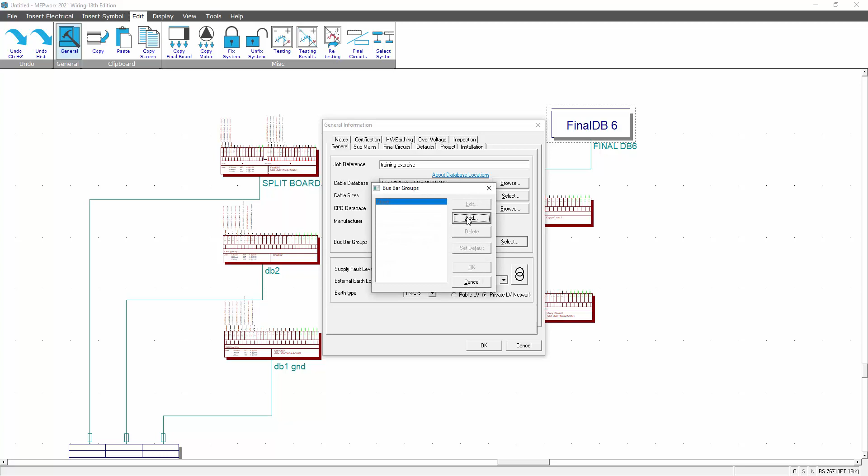So what we need to do, if we're going to put bus bars in, the first thing we need to do is go to Edit General and create what we call a bus bar group. So in the middle of the Edit General tab, you can see bus bars, 0 group selected. So what I've got to do is go and select a range of bus bars from the database based on the ratings of the boards and the fault levels I'm getting. So I'm going to make a sensible selection.

Each of those boards is about 40 amps a piece. So I'm going to look at a minimum between 25 and let's go for, I don't know, 200 amps. And you can also look at your short circuit ratings, fault ratings, so you can be more explicit in your selection process. Obviously, the more explicit you are, this reduces the number of potential bus bars you can apply.

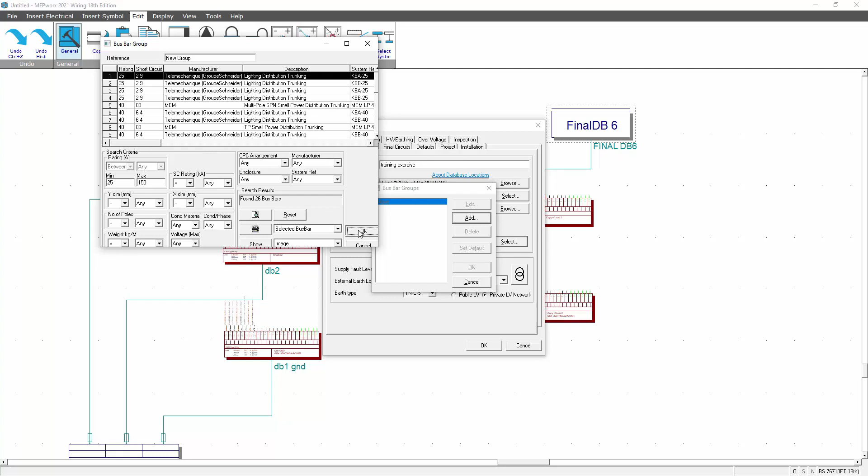So I'll OK that. So you can see there, I've got more than 50, needs to be less than 50 bus bars. So I'm going to bring that selection basis down a little bit. And let's say 150. Run a search on that. 26 bus bars, that's more like it. And OK that. So we've now got our bus bar group defined.

What I need to do is then on the Insert Electrical menu, I can put the component bus bars together by putting a vertical right tap off, where we would put the tap off to the bottom left of the board, and interconnect our individual sections, and then interconnect the cable or the section to each one manually. So we could build it up component by component.

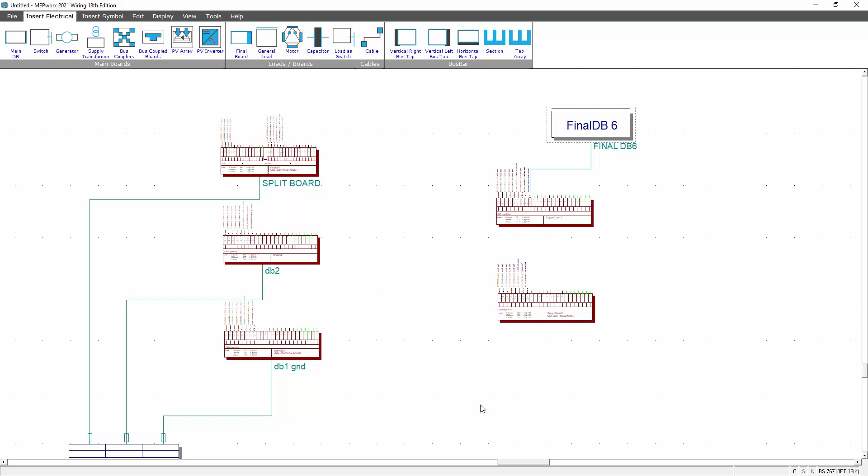So we could put a vertical right bus tap in, and I could put the detail in, and I could put the next one in. I've got to be careful how I line it up, and then I could go in and put my section in between each part here, and build it up. Say OK, make that 4 meters. I'll take it from the bus bar group, so I'll select it from that group. We can edit the group at the same time while we're here, so we can go in and do that.

And then I could run my cable in from each of these sections into the board as well. Now I could interconnect my end coupler with either section or cable, and you can see it's a little bit messy there. There's an alternate way of doing it, and it's far quicker and far tidier. So we'll get rid of this, delete it, click once on cable and delete.

So I can create what we call a tap array. And what I can do is specify number of taps. So it's going to be a vertical bus tap, and we've got 1 to each board. So we've got number of tap offs 2. Default bus length, if it's a rising bus bar, that would be potentially a distance between your floors. So let's say we have 3 meters between floors.

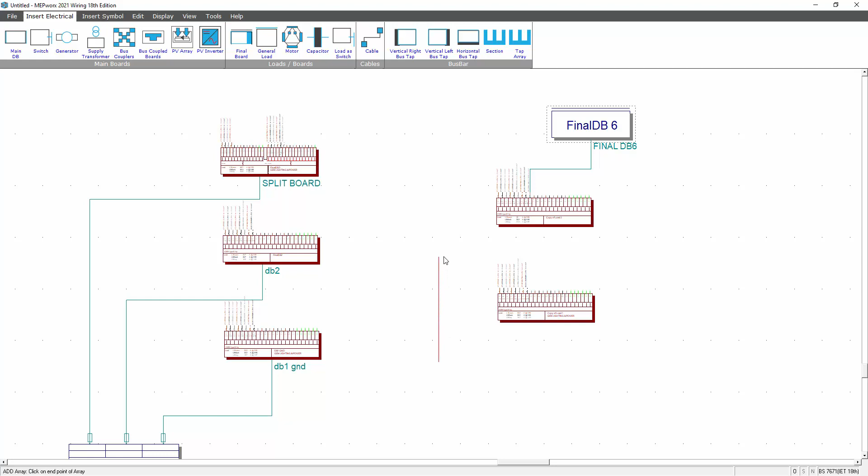We are using manufactured bus bar. I'm referring to the symbols at the top here. If I put it on the left hand side, I'm going to have my tap offs to the boards on the right. So it's a right vertical tap. So I'll say taps on the right. Then if I click once bottom left, let go of my mouse button and drag this up, click once again, that creates my bus tap. Do a refresh on the screen.

And you'll notice that puts bus 3 and 4 in because we deleted the previous one. So I'll go in and edit those references and call that bus 1, bus 1. And call that bus 2 and bus 2. So when you delete bus bars, the records are still there. So you do have to change the references. And I'm going to move these a little bit more, tidy it up a bit.

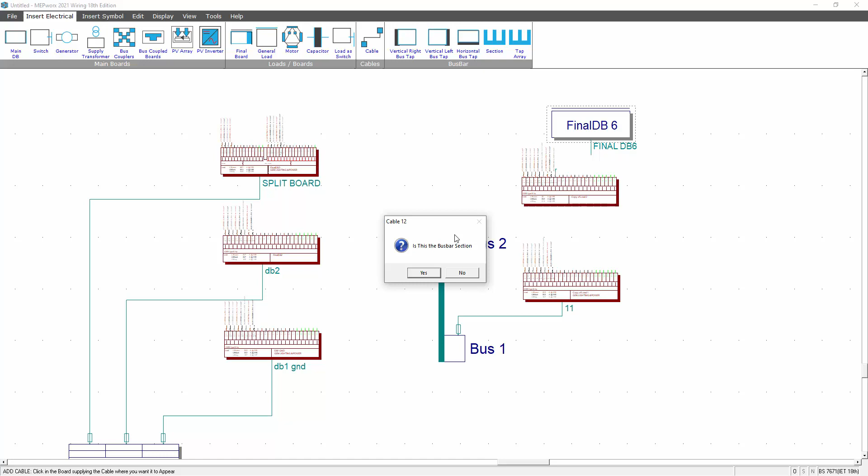And then what I can do is then insert electrical cable, select the bus bar tap off point, click for each change of direction and click into the board. Let's make that a couple of meters. And when we get to this one, it doesn't know what's happening above it. This could be connecting onto a different bus bar section. So you need to confirm whether you want to put it in bus bar section or cable.

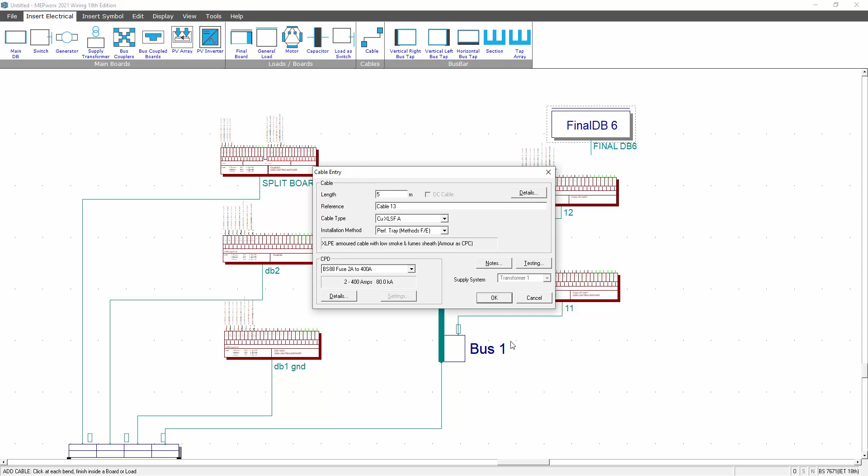Is this a bus bar section? No, it's my intention to put it in cable. So I'll then just put that in there. Then what I could do is run my end feed cable, or it could be a bus bar tap off again into here. That might be only a couple of meters in the plant room. The tap off. Then when we display calculate, that then calculates the bus bar tap off.

And of course, as you build your system up, if you are putting bus bar in upstream, and you are fairly tight on the fault levels on the board, the extra cross-section area of copper might actually increase the fault level, and you could introduce problems with your devices on your final board. So again, always best to sort your problems out at the end of the process.

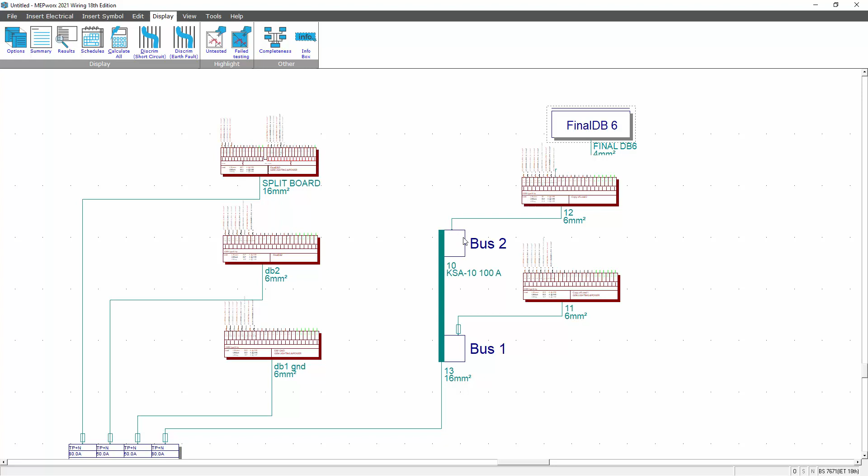And as I say, you could have another tap off. If you had another board here, I could tap off up to another board, so that you're not limited to one tap off per section, one cable per section. You can have more than one cable emanating from a tap-off.